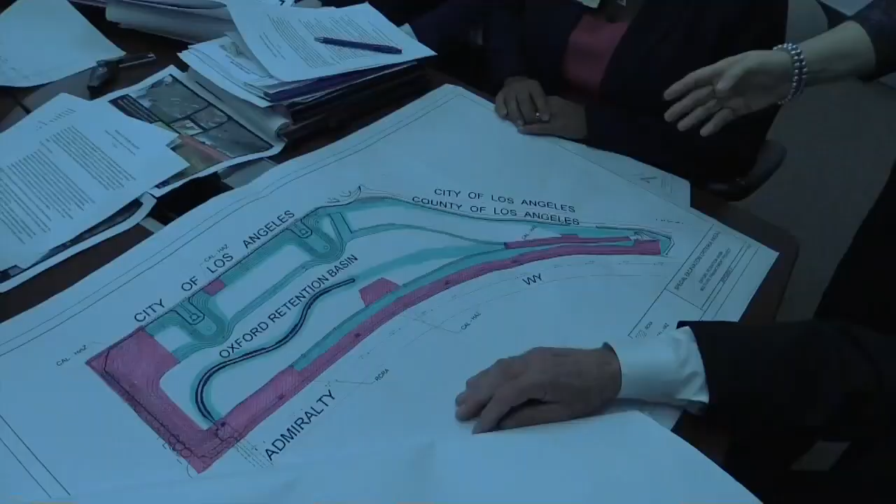I mean, like I said, we won't be doing anything other than removing the trees and shrubs, then replanting. So you could replant as soon as the replant contract is approved. And when is that vote scheduled for clearing and grubbing the area?

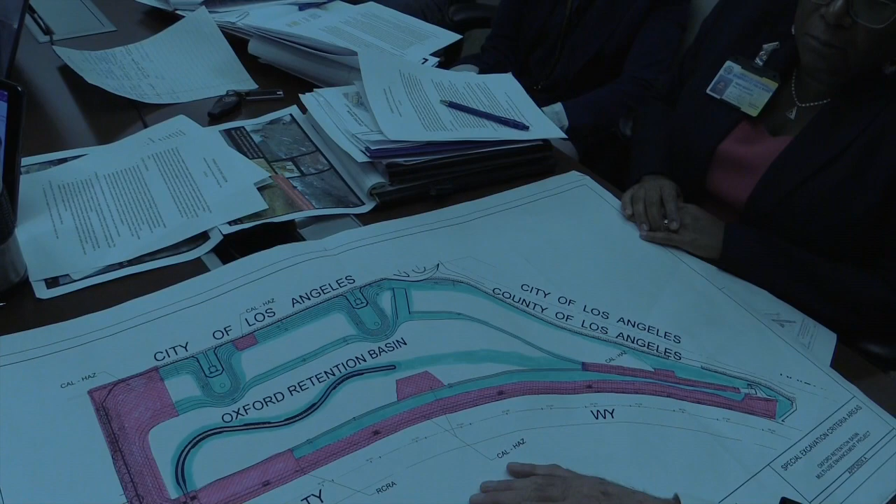We've got to - what is the contract start? It's not relevant. Could I have - we're not understanding there, why you don't want to grade this area, which I'm glad you're not going to do?

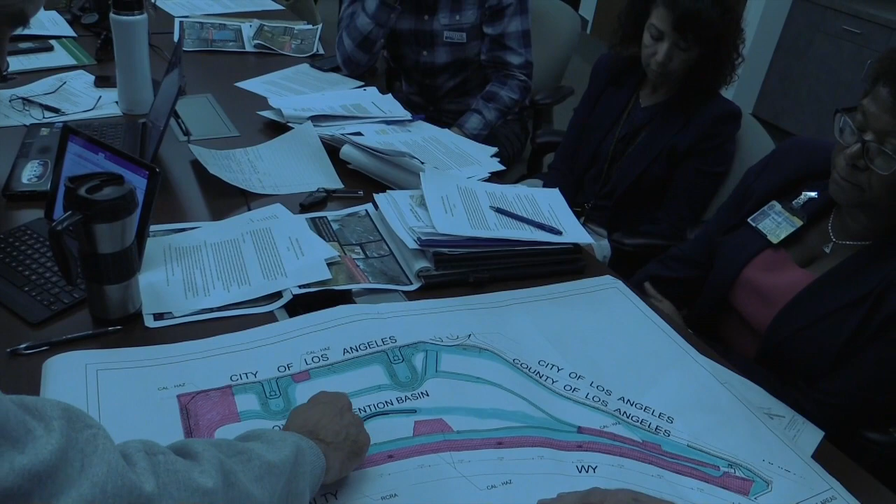So explain the grading right here that you want to do in this blue strip. That is just changing the flow patterns. But is the bank area, the blue, lower than this area or higher? Minus - which one? That's 0, so this is -2, and it's going to be lower, okay.

So help us understand - in this area, it looks like the area that you're going to be regrading includes the trees that we wanted to preserve in place. So can you talk with us about how you're planning on approaching that so it doesn't impact those trees that we wanted to leave?

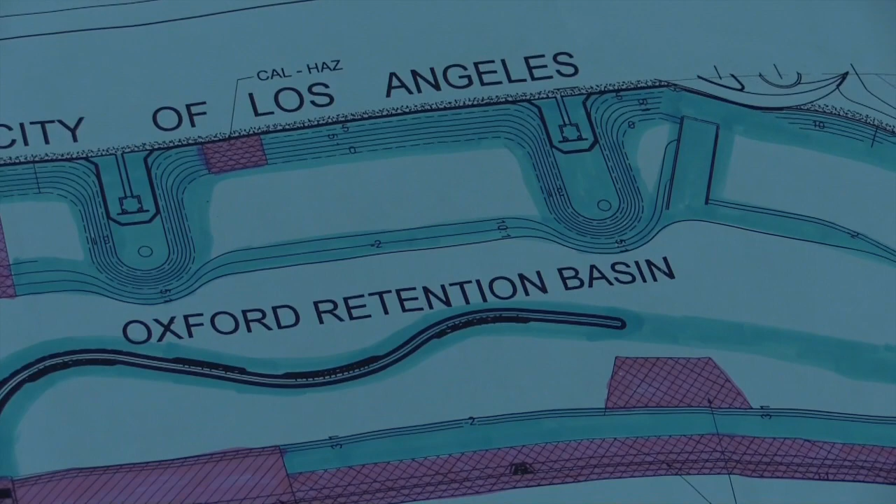Especially the red ones, that's what we're going to have - we're gonna have to take a look at that. Can you share some thinking with us about what you've talked about so far? There you've got problems, okay? Because if you're gonna keep a tree,

Marcia, do you want to join us? This was actually specifically about soil removal around the eucalyptus that we want to keep. You can see that they're planning to regrade through that area that we just talked about saving the trees.

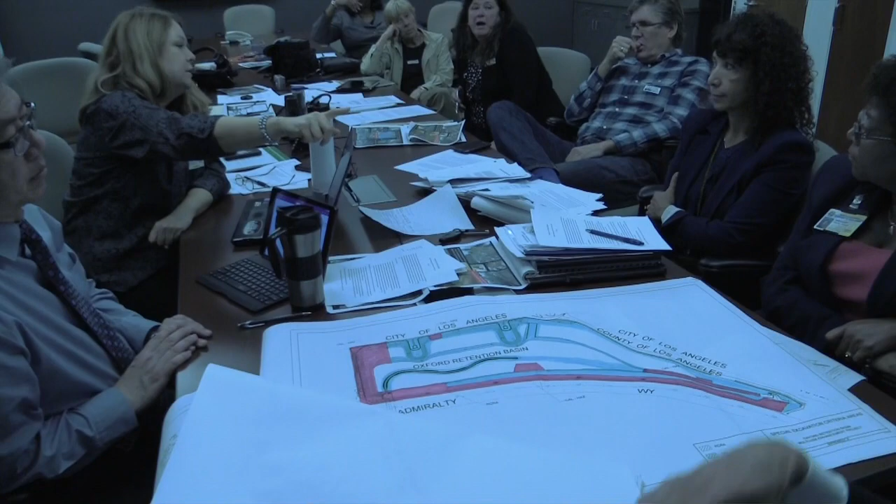So how we were just asking - the red constitutes removal, is that correct? That's where they're doing the main excavation. Red and blue. So how will you save the trees if you're removing all the soil around?

He highlighted in pencil - he might not be doing that. Let me explain. Oh yes, please, that's why I wanted to. So if we are going to leave a tree in place, and there's contaminated soils around it, what we have to do is stay outside the drip line, remove the soils, but we can't get into the drip line.

Okay, all the roots? No, the drip line is where you're right - that you're saying don't go past the drip line, the soil around, on the outside of the drip line. Think of a tree like a dumbbell.

But the dumbbell is buried in the ground, and you're only seeing half of it. Yeah, no, I understand. So the drip line and the roots are - so you generally would be going just going around the drip line, on the outside. Jim, I'm confused.

In response to your question, how would we approach it if we were to approach it - that would be the general approach. Now the practicality is, can we do that? So we have to go and look at that specifically, and then we'll respond.

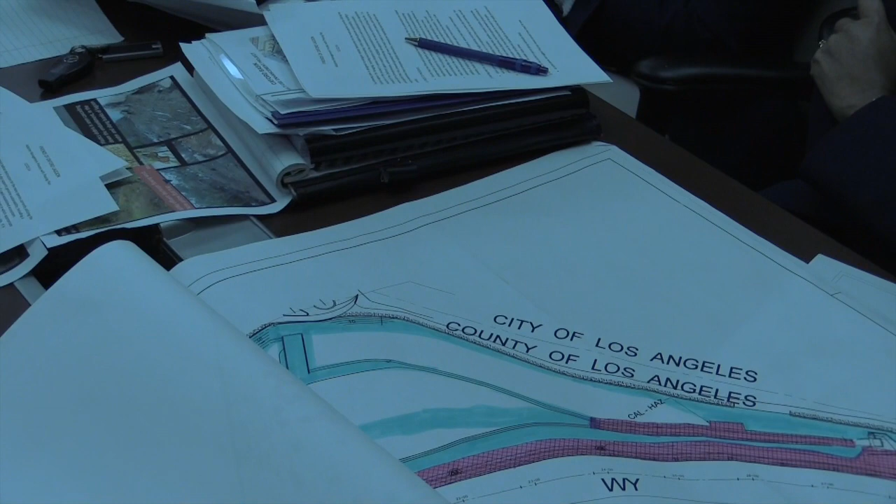Some of these areas, I need to look at the specific profile. I think they vary from 1 to 2 feet. If that goes deep, you're gonna end up with a huge sump at the back, and the water won't be able to flow out if it's deeper there. I'm not the designer, I'm just looking at the plans telling you.

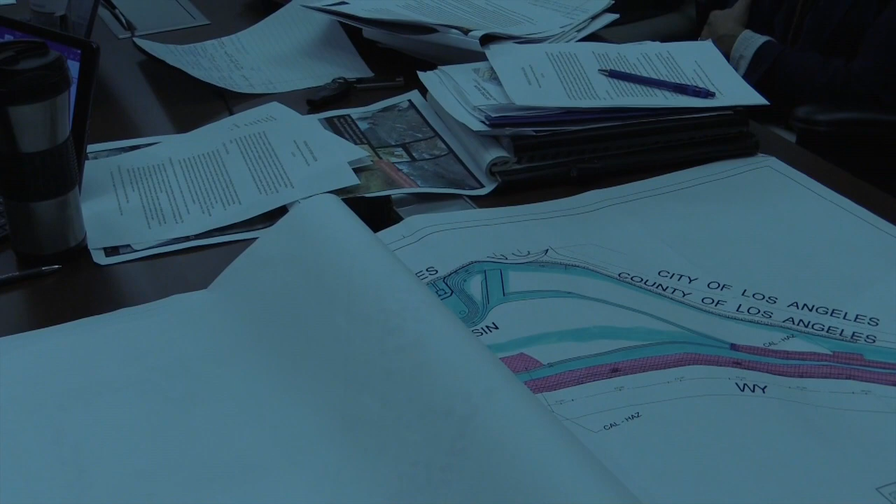Jim, may I just clarify one little thing, which is why I've spoken - I'm trying to take a picture of this. I'm sorry, a soil scientist, PhD, professor, specialist in soil science, was looking at a bit of the report and showing me, and so far we think the contaminated chemicals in the soil are elevated levels of cadmium in some spots and some lead.

But not at a federal level, at a state level. So this soil scientist confirmed what I brought up a week ago, that the contaminants are buried and will not interfere with plant growth or animal life, and they're kind of sequestered and trapped in the soil.

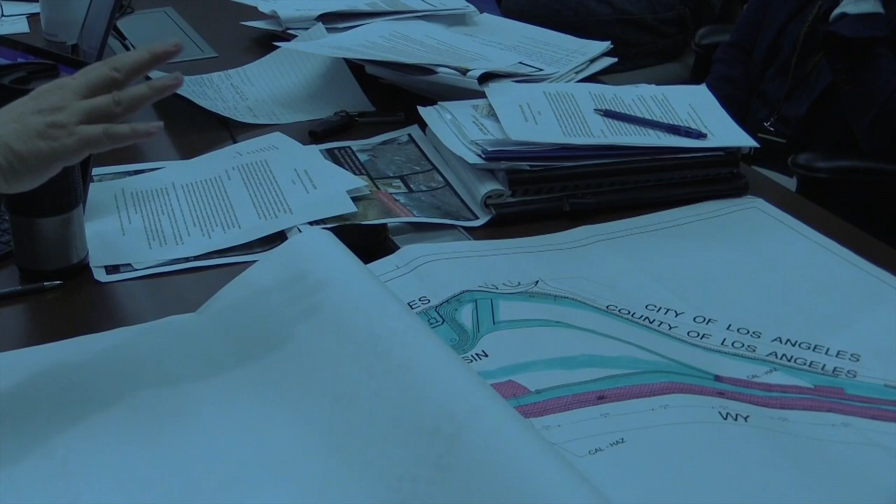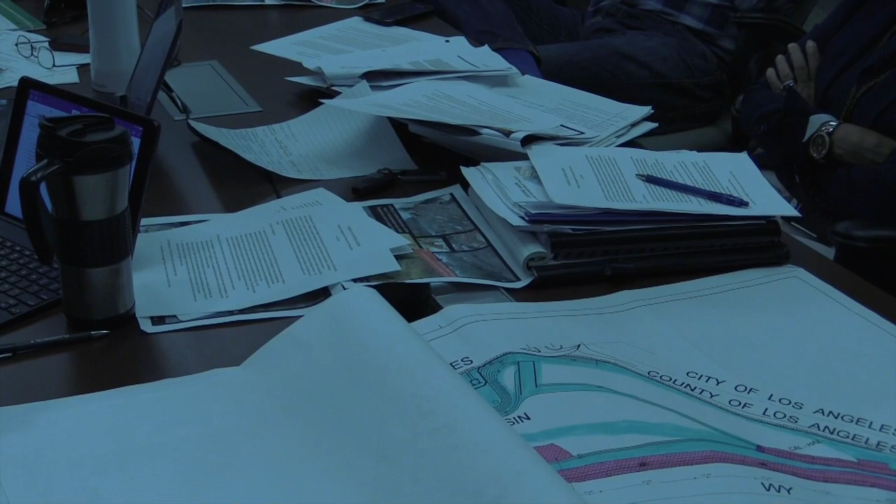Digging down to get to those contaminants could release some into the water, so that's not so much about removing the contaminant. When I said we'll go deeper, that's actually for the drainage, for flood control enhancement. So the soil removal we're talking about here is not so much about contamination, it really is more about your plans. Right, because you have to remember this is primarily a flood control facility.

I'm sorry, I'm standing here, I apologize for hanging on your shoulder. Somebody's always hanging on my shoulder, don't worry, I'm used to it, it's okay.

I just wanted to confirm, the red is the area that is contaminated soil, and that's the soil you intend to remove. Yes. And that's approximately 2 feet through that area?

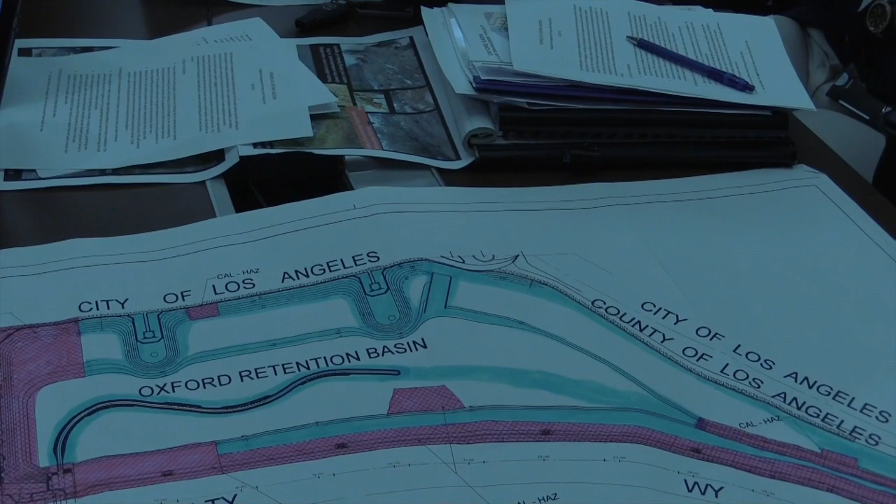No, it all depends. So you have actual soil sampling per the areas that need to be removed? Yeah, right. I might have erroneously stated the entire place was 2 feet. No, it all depends on the actual profile.

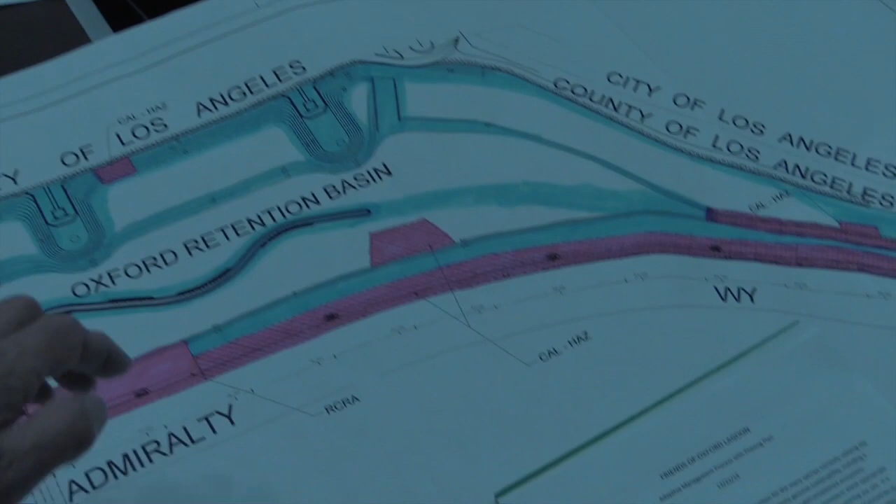So will you be doing some other sampling? Because I note that the samples were only around 20 around the entire perimeter. So will you be doing additional sampling to see where the contamination is? No. You're just taking care of where you did find it.

And then the blue would be areas that you are reconfiguring? Regrading, yes. I also noticed that in the soils report it says that certainly half of it is just non-hazardous fill anyway.

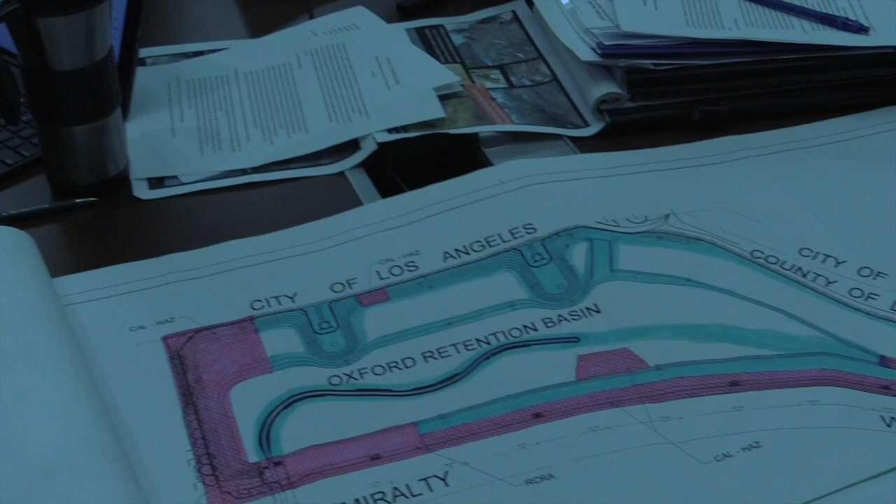Right, but you don't have the interior marked here, because this is an area where you do intend to take out also? No, that's light sediment, it doesn't need to change. You're not? Certain areas, but I think for the majority it's still the blue area.

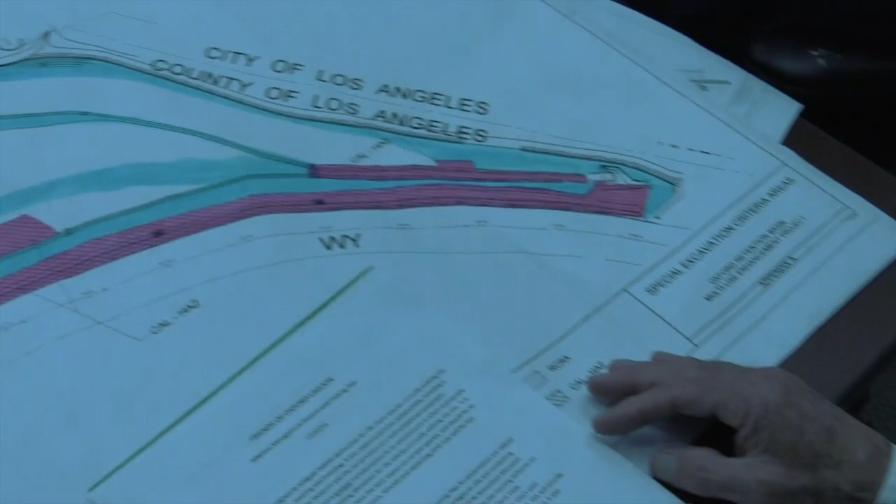No, I'm sorry, this is really a change for me. The interior area here, which we believe is where the sediments have come in and settled, that is not being removed? That's where we're taking this out. The white? No, we're taking out just the blue, not the white.

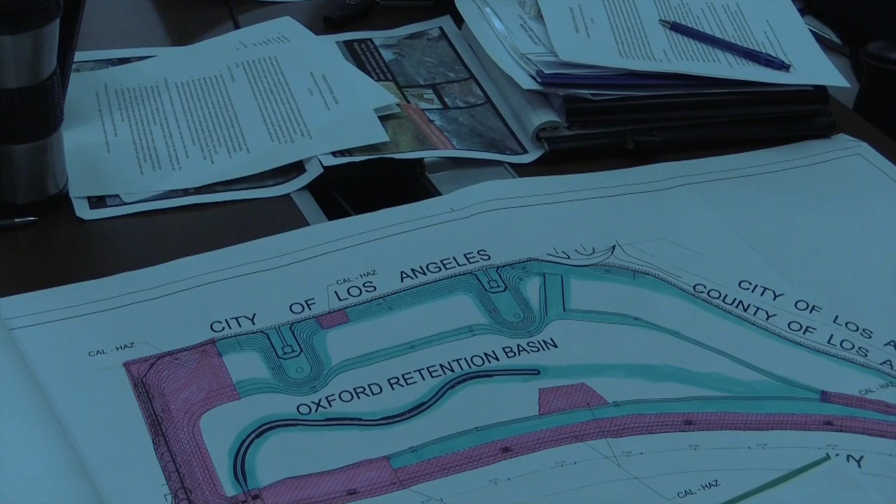The white remains. But isn't the white where the berm is? Yes, but the berm has got a blue line on it. So I'm still confused. Well, Angela just gave me this.

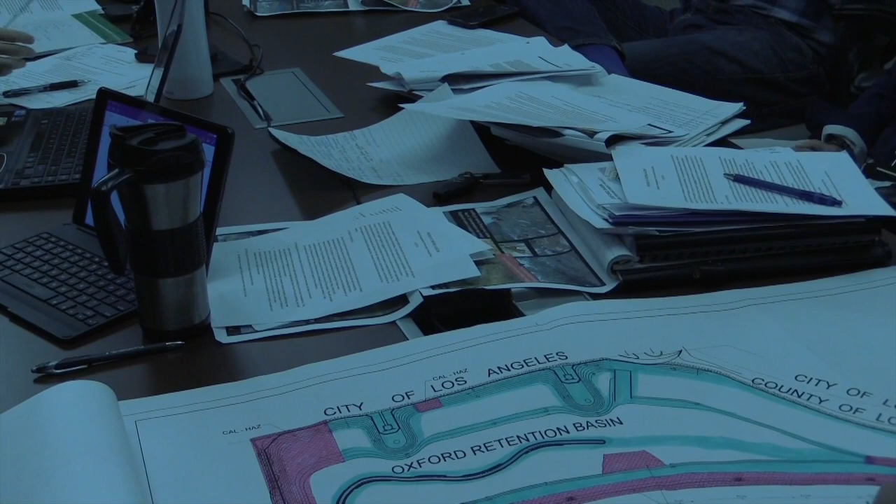This is what we've been asking for, as to what is the directive from the State Water Board. This is a bacteria TMDL and it has to be complied with by December 2015. So great, but how does that relate to why you would have to remove the soils beneath the trees? That doesn't make sense to me.

That's not about bacteria, we found contaminated materials in here. What kind of contamination? As you stated, lead. But it's not that high, it's not something you're being directed to by the water board to deal with.

They say both, Marcia. They say contaminated material as a whole. So I'd like to see that order, because I don't see that the water board is ordering you to take out the soils under the trees. That's the part I don't get.

I don't think the water board is going to dictate to us to remove the soil under the trees. They're saying whatever soil remediations you need to do to improve the circulation, and if you have leaching from the surrounding soil, then you need to do those removals by December 15th.

But there's no proof that there is that. I mean, that's for December 15th, 2015. Okay, so that was... but that's bacteria, that's not the same thing.

So the bacteria is one thing, but we have lead in the soil underneath the trees. That's not much bacteria, not what the board has said. It is designated in the URS report. We have lead in the soil, and lead leaches.